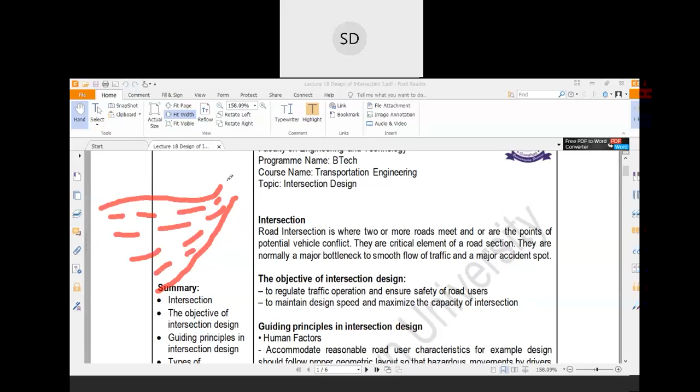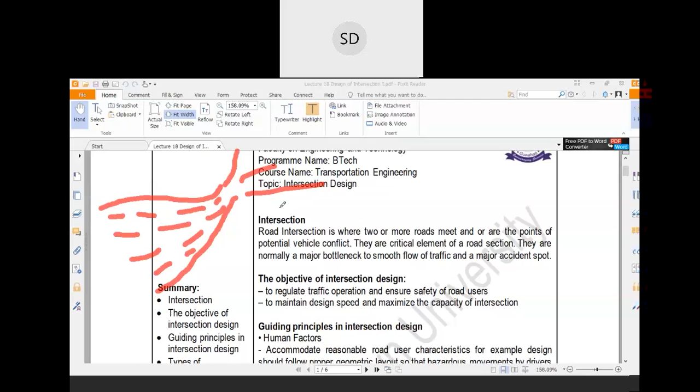And whenever they leave the intersection, again their path would be like that. So this is basically a bottleneck position, and as there are different roads merging with one another, there are vehicles from different directions, and for these reasons there are chances of accidents at intersections.

Now, the objective of intersection design is to regulate traffic operation and ensure safety of road users, and to maintain design speed and maximize the capacity of the intersection. So that is basically the objective of intersection design.

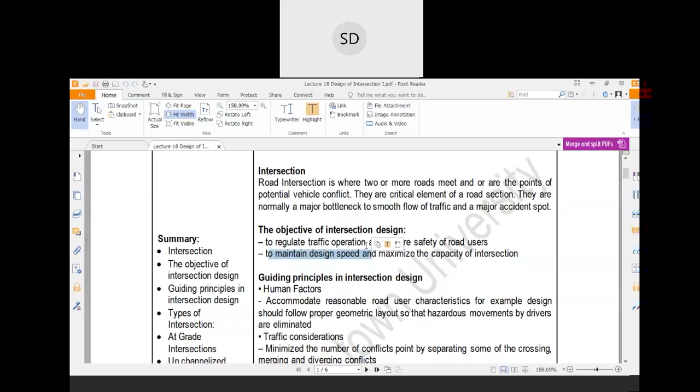So whenever you are designing an intersection, you have to keep in mind the amount of traffic coming from different roads which will be meeting with one another. Based on the traffic conditions or the number of vehicles merging at a particular intersection, you need to design that intersection based on that data.

Now, what are the guiding principles? There are different guiding principles which affect intersection design. The first one is human factors - there are different factors which affect human characteristics whenever they are driving in congested situations. This should accommodate reasonable road users' characteristics.

For example, the design should follow proper geometric layout so that hazardous movements by drivers are eliminated. In intersection design, you have to provide adequate sight distance, and if possible, provide more distance or more visibility to the intersection, so that all types of hazardous conditions can be avoided.

Then there are traffic considerations, which minimize the number of conflict points by separating some of the crossing, merging and diverging conflicts. What are these crossing, diverging and merging conflicts? We will discuss this later on in this class.

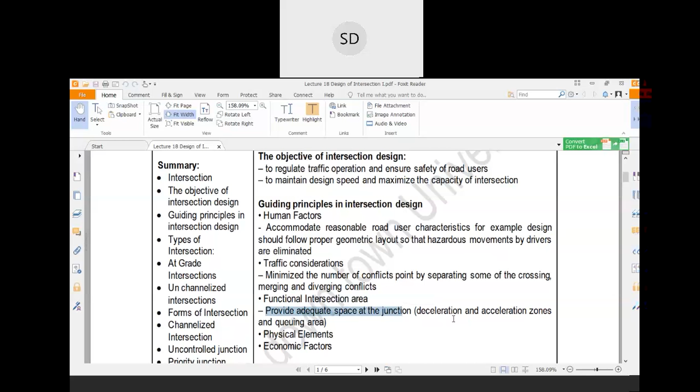Then there's the functional intersection area, which provides adequate space at the junction. Functional area means the portions where traffic changes its route - that is the main portion of the intersection.

And there are different physical elements like traffic islands. As we discussed in the previous class, there are different merging and diverging islands, and there are different elements which can be called physical elements.

Then economic factors are also associated with it. For a plain intersection there is not so much cost associated, but if you want to design an overpass or underpass, the cost required would be higher. Similarly, if you go for a signaling system, the cost may also be higher. So you have to think about different scenarios and justify the cost on which you will design the intersection based on the traffic scenarios persisting there.

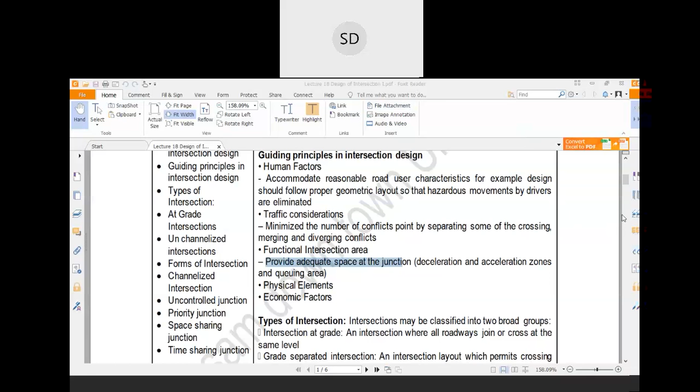Now there are different types of intersections. Primarily there are two types: intersections at grade and grade separated intersections. At an intersection where all roadways join or cross at the same level, they are called intersections at grade. Suppose we are considering a simple intersection like that - two roads meet with each other at the same level. So these types of intersections are at-grade intersections.

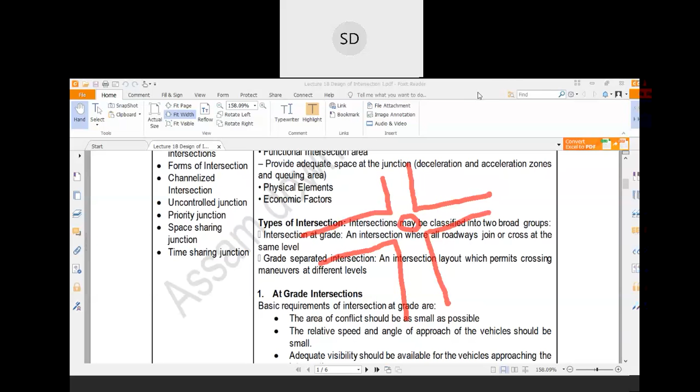This is a simple intersection. Now suppose there is a rotary intersection. In that case also this is an at-grade intersection where two or more roads meet at the same level. Now there is another type of intersection called grade separated intersection, where two or more roads meet at different elevations or different levels. For example, there are underpasses or overpasses or overbridges, whatever you may call them.

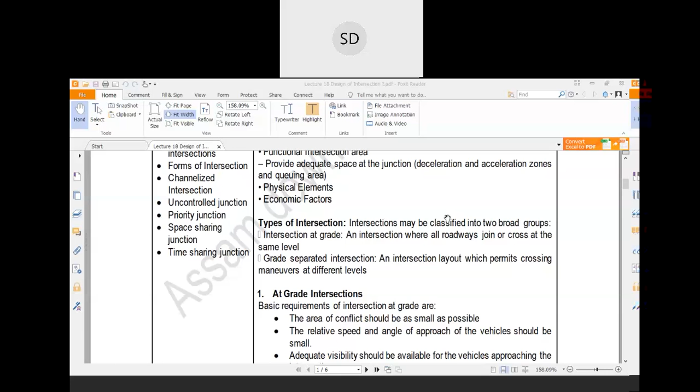Now if we discuss the at-grade intersections, there are different basic requirements when we go for at-grade intersections. The first point is the area of conflict should be as small as possible. Area of conflict means the area where different vehicles meet or there are different possibilities of conflict of vehicles. So that area should be minimum.

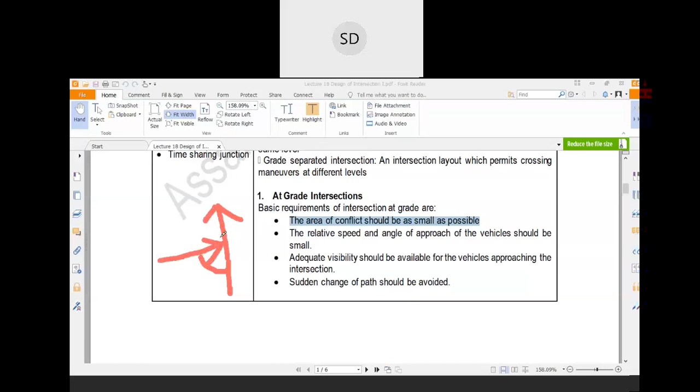Now if the angle of approach is more, there would be chances of severe conflict. Suppose this is a vehicle and this is another vehicle - if the angle of approach is more, in that case the severity of the accident would be higher. As the angle of approach becomes higher, at some point there would be chances of head-on collision. Therefore it is always advisable that the angle of approach be minimum. If the angle of approach is minimum, then if there is some conflict or accident, the severity of the accident would be minimized. That is angle of approach.

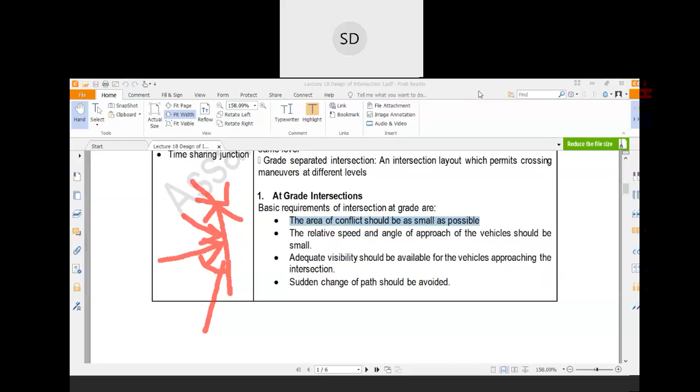Then adequate visibility should be available for vehicles approaching the intersection. If adequate visibility is not provided, the driver in a particular lane could not see other vehicles which are approaching from another route.

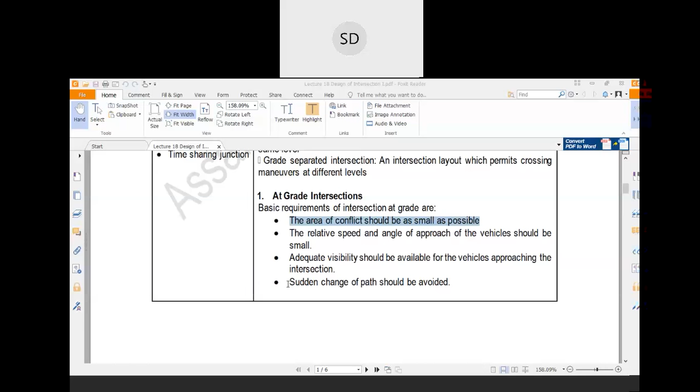Then sudden changes of path should be avoided. The intersection area is a very hazardous area, so in such an area, if any vehicle suddenly wants to change its direction or suddenly change its lane, it would become more hazardous. For this reason, it is always advisable that vehicles cannot change their path suddenly.

Then geometric features like turning radius and width of pavement should be adequately provided. You know that at the intersection there are chances of traffic congestion, so it would always be better that the intersection area has a higher width than the normal road section. In this way it can accommodate more vehicles.

Then proper signs should be provided wherever needed. Suppose some vehicles need to stop, in that case you need to mark it over there. In some cases you may observe that intersections are traffic police operated, and vehicles in a particular approach need to stop to make way for vehicles coming from another direction. In such cases, if vehicles need to stop at a particular position, you have to provide adequate road markings so that all vehicles can stop at that position, and no vehicle should cross that mark whenever a traffic police officer or signaling system signals to stop for that approach. Therefore the signs provided at the intersection should be very clear and understandable.

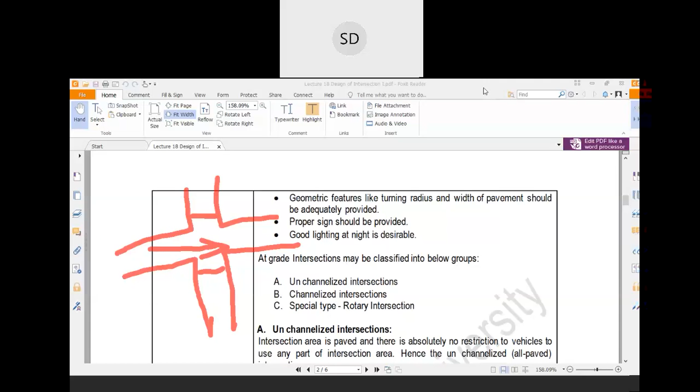Good lighting at night is also advisable and desirable for the swift operation of the intersection.

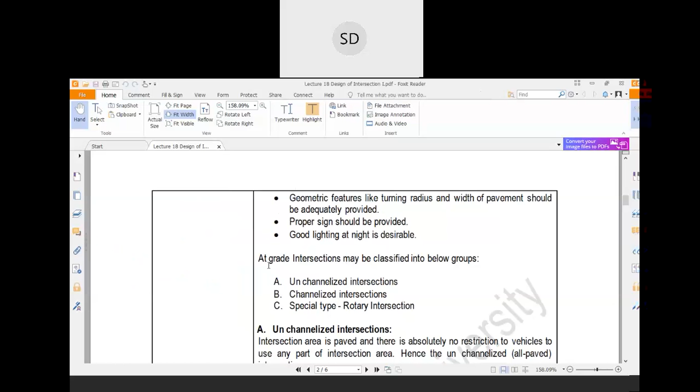Now, at-grade intersections may be classified into the below groups. There are different classifications for at-grade intersections. First is unchannelized intersection, then channelized intersection, and there is a special type called rotary intersection.

Unchannelized intersection is a very plain intersection where only two or more roads meet with each other, and where no channelizing island is provided. In our previous class we discussed the channelizing island. So in the unchannelized intersection there would be no channelizing island.

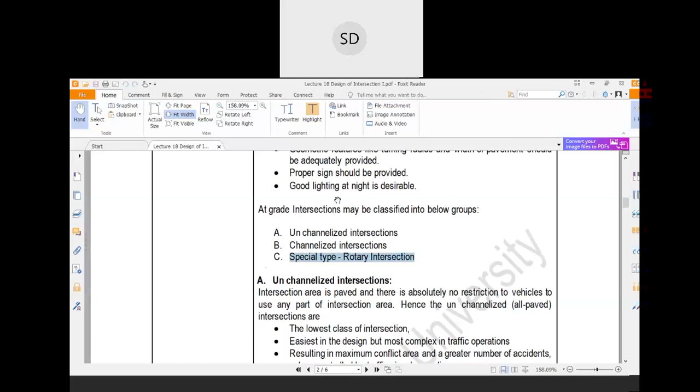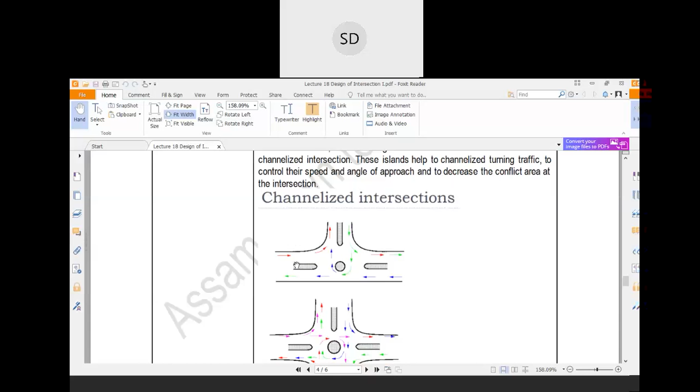What is this channelizing island? These are channelizing islands, which enable or force the traffic to move into different channels whenever they are trying to move into the intersection. In the unchannelized intersection this type of channelization would not be there, and it would be a plain, simple intersection like this one, with no channelization, only a simple plain intersection.

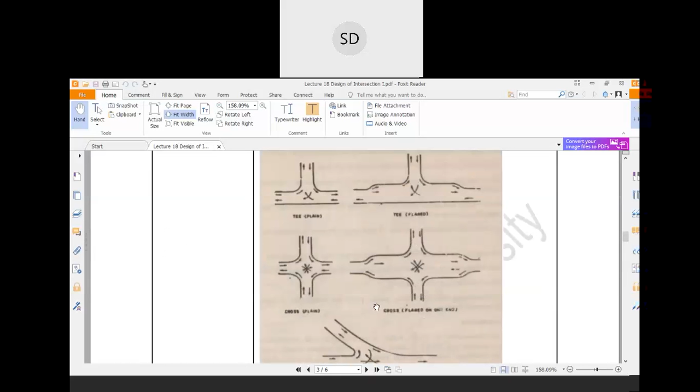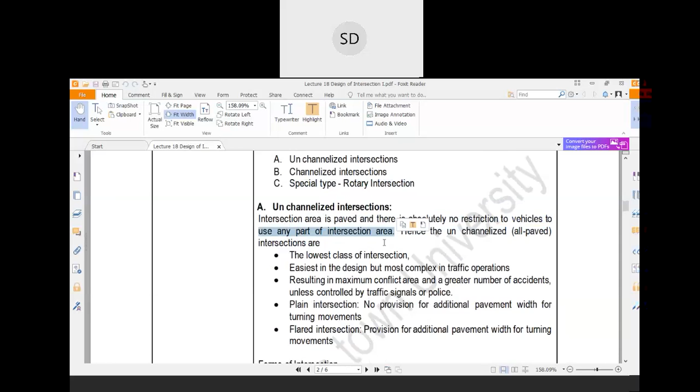In unchannelized intersections, the area is paved and there is absolutely no restriction on vehicles to use any part of the intersection area, as there are no channelizing islands; therefore they can use any part of the intersection area.

Therefore, unchannelized intersections are the lowest class of intersection, because they can manage traffic only to some extent, not to a great extent. Their management of traffic in the intersection is very low. They are simple, basic intersections, and they are easiest in design.

Why are they easiest? Because no extra element is provided in the unchannelized intersection. Therefore they are very easy to design, but the traffic operation in the unchannelized intersection is very complex, because it is very difficult to control all the vehicles whenever they try to move all together.

In some cases there may be chances of traffic accidents and huge traffic congestion if the number of vehicles increases tremendously for an unchannelized intersection. Therefore, unchannelized intersections are suitable at places where traffic volume is very minimal, since they result in maximum conflict area and greater number of accidents unless controlled by traffic signals or police.

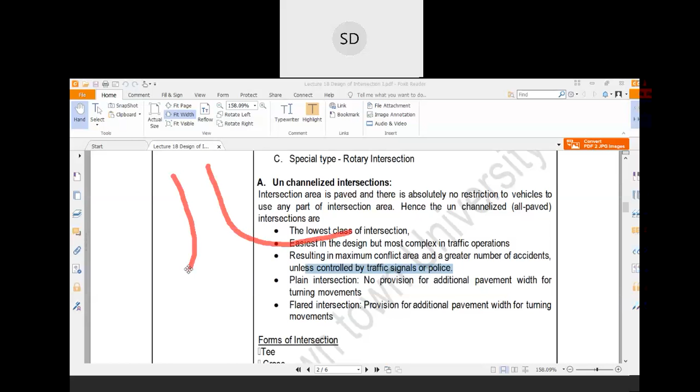Now how would a flared intersection be? A flared intersection would be like that. Suppose this is the intersection area. The intersection area would be wider than the normal road width, so that a vehicle can easily move from one route to another route swiftly.

So there are two types in the unchannelized intersection: plain intersection and flared intersection.

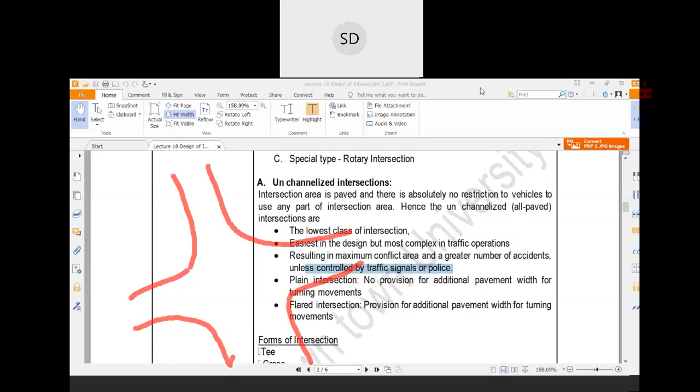Now, based on their forms, there are different types of unchannelized intersection. See the pictures; I think these pictures are visible to you.

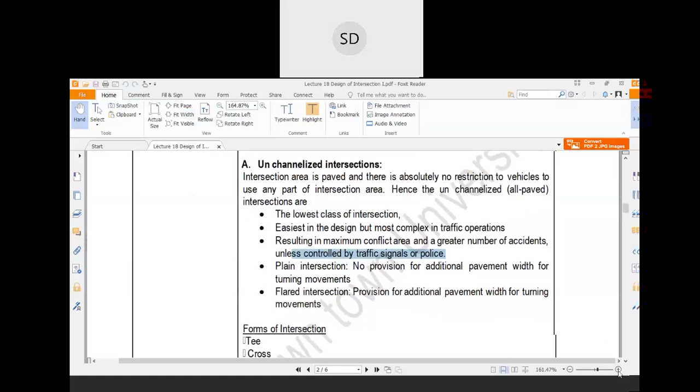First is T intersection. This is a straight road, and it meets another road at a 90-degree angle. This is called a T intersection.

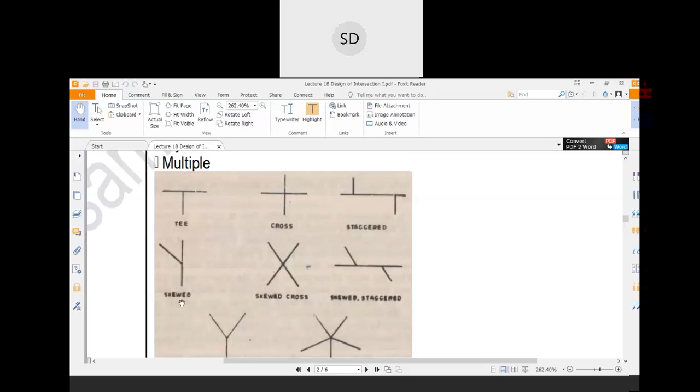Then skewed intersection - this meets the main road at some angle. This is skewed intersection, this is skewed cross, and this is skewed staggered intersection. This is Y intersection, and this is multiple intersection.

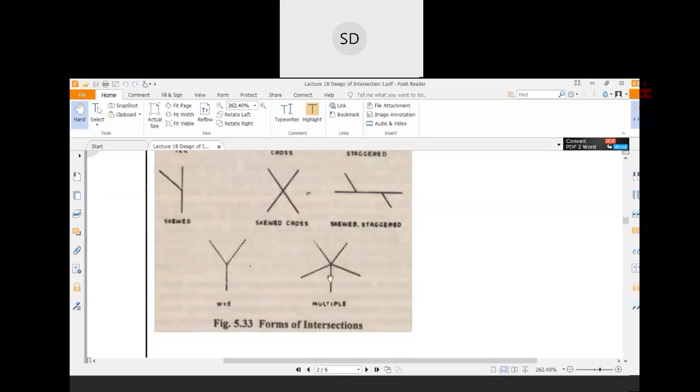Basically, this multiple type of intersection is not suitable for an unchannelized intersection.

See, these are the flared intersections and these are the plain intersections. This is plain, okay, these are flared.

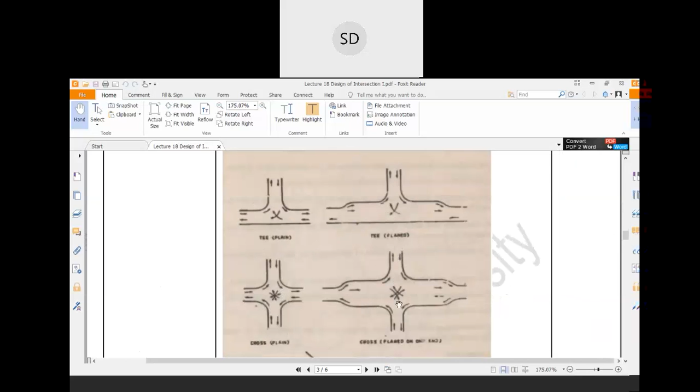Now, next point, traffic conflict. So the first one is merging conflict. Merging conflict occurs when vehicles enter a traffic stream at some angle.

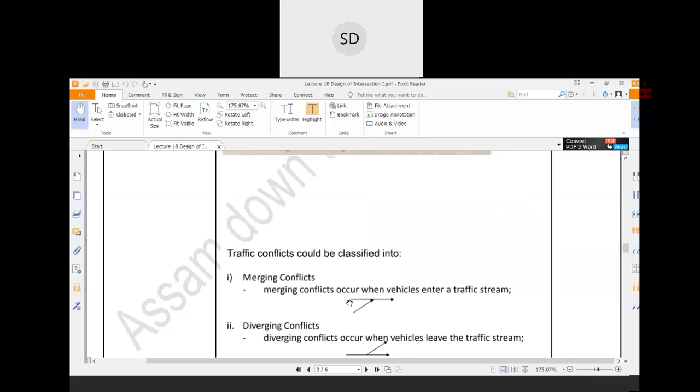Suppose this is your main traffic lane. In the merging conflict, some vehicle will try to enter the traffic stream at an angle. Basically this vehicle is trying to merge with that stream. Therefore this is called merging conflict.

Now another type is diverging conflict. Suppose this is the existing traffic stream, with different vehicles moving in this way, and sometimes some vehicles try to leave that traffic stream. This is called a diverging conflict, since they try to diverge from the existing traffic stream.

Then coming to the next, crossing conflict. Whenever two vehicles or two streams try to cross each other - suppose this is the existing stream, and another vehicle or stream tries to cross the path of the existing stream - this is called crossing conflict.

And the last one is weaving conflict. Basically here two streams are changing lanes and make crossing conflicts over there. So this is weaving conflict.

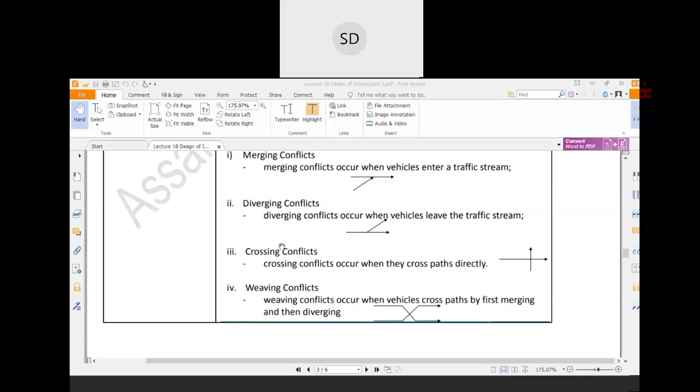Among these, weaving conflict is very rare. Among merging, diverging, and crossing conflict, the most dangerous one is crossing conflict. So as an engineer, your first task is to reduce the crossing conflict at a particular intersection.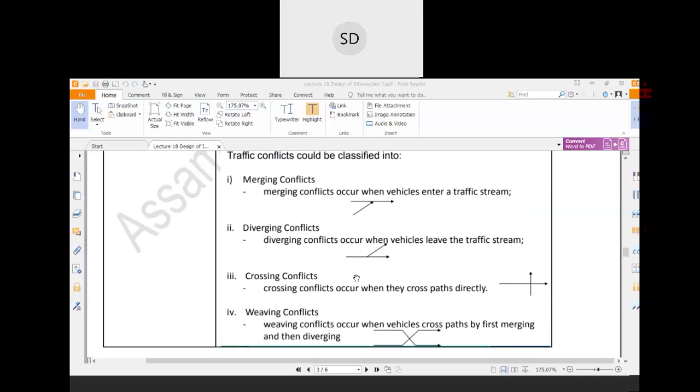Now, if we calculate the crossing conflict, merging conflict, or diverging conflict over a particular intersection, we can find these values. You can also draw this in your handbook if you wish to.

Suppose this is the road, and this is the path of the vehicle in this direction. Suppose this is a T intersection.

In that road, some vehicles will be merging or diverging from this existing lane and will go in this direction. So here one conflict position will generate - this is the conflict position. This is called diverging conflict because some vehicles from this existing lane are changing their route and going in that direction.

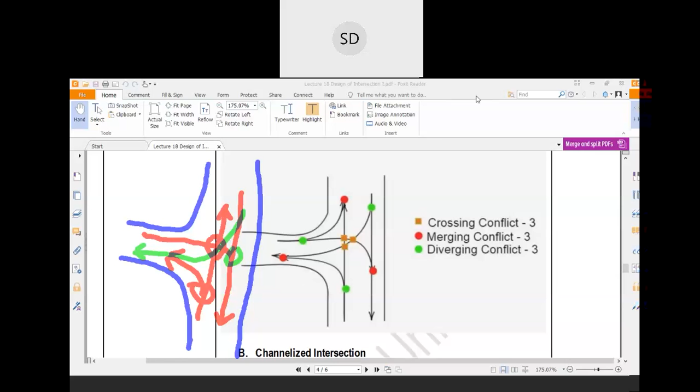Crossing intersection means like that - suppose this is an intersection. You can find out the total number of crossing conflict, merging conflict, and diverging conflict in this portion. So you can draw this.

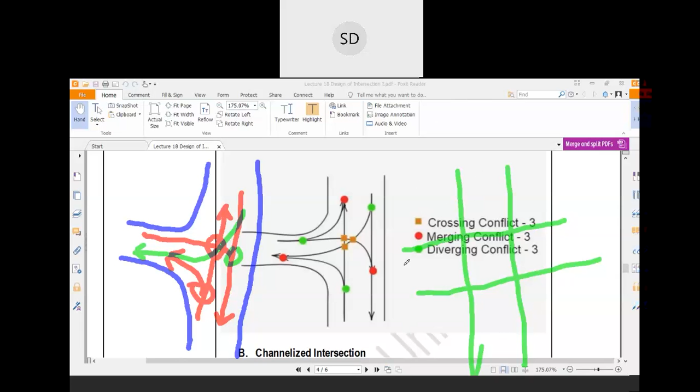So you can try to find out what are the different types of conflicts existing over there.

So next portion is channelized intersection. In the channelized intersection, there will be a channelizing island which will channelize the entire traffic stream. Separation of the conflicting movements at an intersection into definite paths of traffic flow by means of lane marking, island, road curbs, or other means is called channelization.

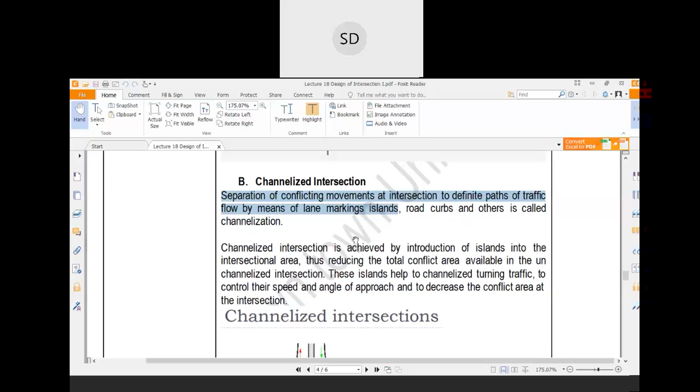So basically you are channelizing different conflicting traffic through different channelizing means, like channelizing islands, pavement markings, or road curbs, etc. Now, channelized intersection is achieved by introduction of islands into the intersectional area, thus reducing the total conflict area available in the unchannelized intersection. These islands help to channelize turning traffic, to control their speed and angle of approach, and to decrease the conflict area at the intersection.

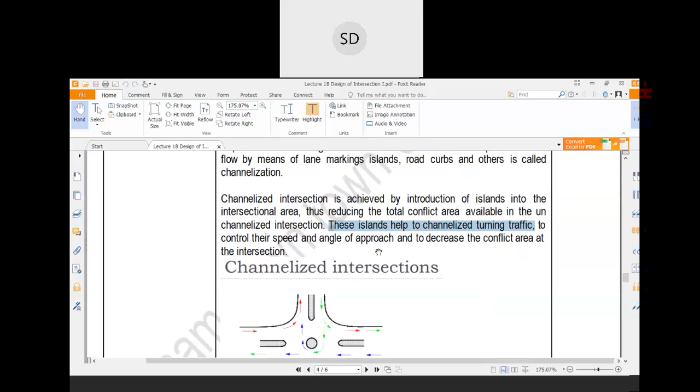Now previously, this was a T intersection. For the T intersection, you have found out the total number of crossing conflict, the total number of merging conflict, and the total number of diverging conflict in this plain T intersection.

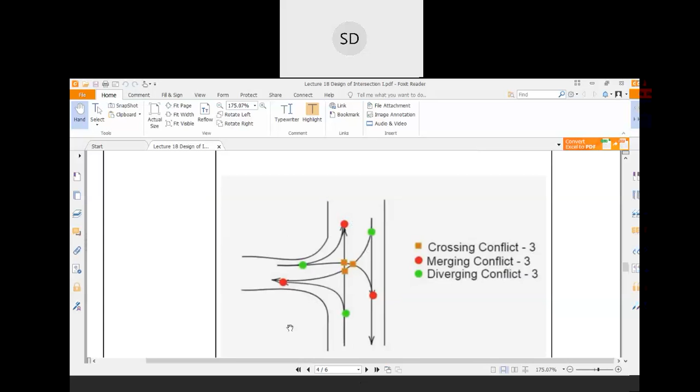Now, similarly, you can find out what is the total number of conflicts in this channelized T intersection, and you will find out that the number of crossing conflicts in the channelized T intersection will be significantly reduced. See, in the channelizing island, a central small rotary section is provided.

These vehicles will be going in this direction, and previously they would simply make some crossing conflict, but here they merge with the existing traffic. Suppose this is the traffic stream, they will merge over there, and at another point they will diverge from here, and again merge in this portion. So using this channelizing portion, you have reduced the number of crossing conflicts over that particular area.

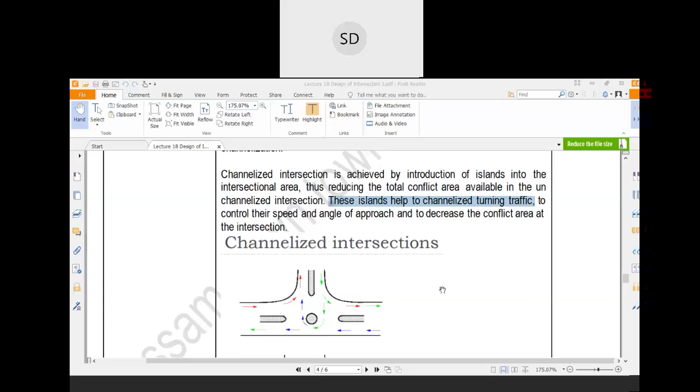So this is the benefit of channelizing the intersection, and this is the usefulness of a channelized intersection. Whenever your traffic is more, in that case you can provide the channelizing island to control the traffic.

Now, advantages, as we discussed. Vehicles can be confined to definite paths. The channelizing island provides a proper place for installation of signs and other traffic control devices. So if you want to put some traffic signs and other devices, you can place them over that island.

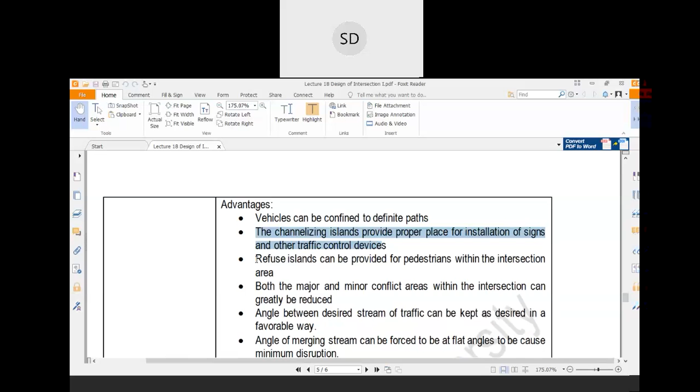Refuge islands can be provided for pedestrians within the intersection area. Suppose some pedestrians try to cross that path, in that case they can rest over that intersection area, and whenever there is no vehicle they can cross that particular area. So this portion can act as a refuge for the pedestrian.

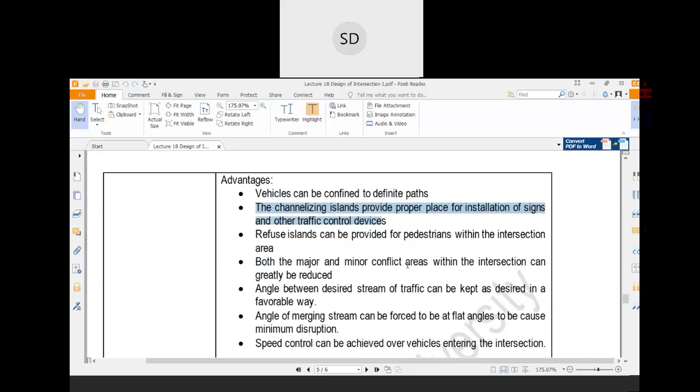Both the major and minor conflict areas within the intersection can greatly be reduced, as we discussed. The angle between the desired streams of traffic can be kept favorable, that is your angle of approach.

Angle of approach can be minimized with the help of a channelizing island. Then the angle of merging streams can be forced to as flat an angle as possible to cause minimum disruption. So merging angles or diverging angles can be kept as minimum as possible.

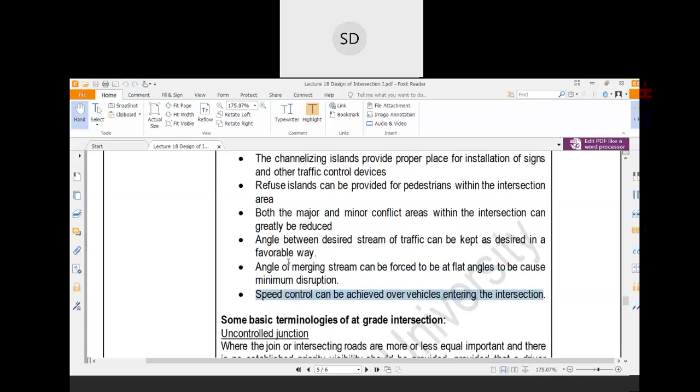And speed control can be achieved over vehicles entering the intersection, as they are forced to follow a particular path, therefore their speed would be automatically reduced.

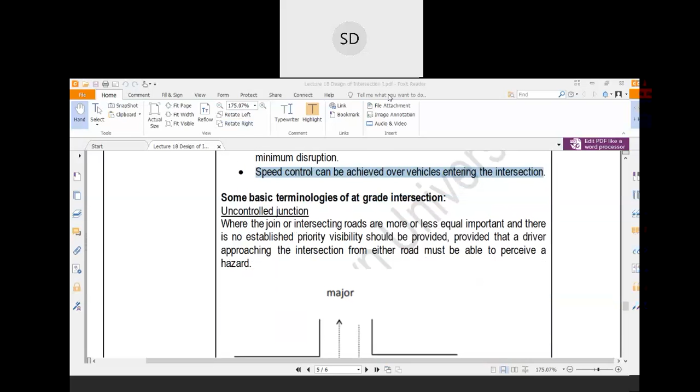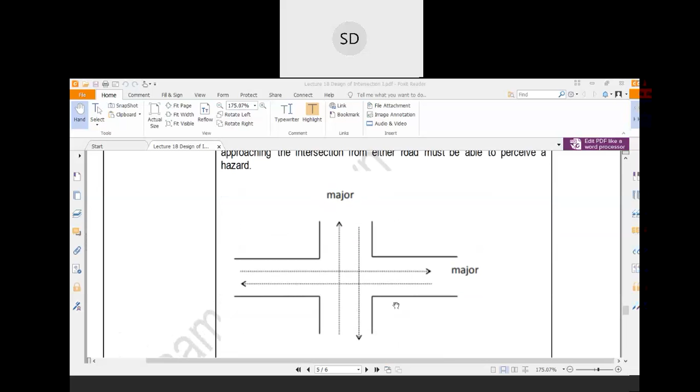Now there are some basic terminologies used in at-grade intersections. The first one is uncontrolled junction. This is an uncontrolled junction where two major roads meet with each other, and there is no imposition, no traffic signals, no traffic signs, etc. This is an uncontrolled junction, there is no control.

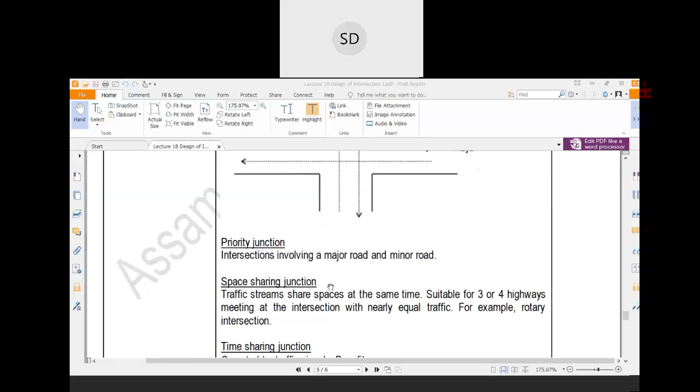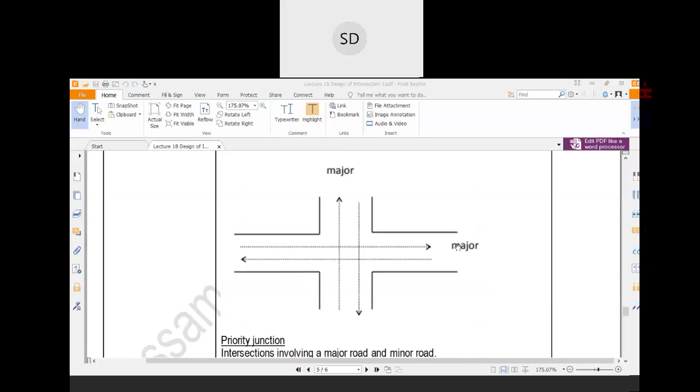Then priority junction. In uncontrolled junctions, here two major roads meet with each other. Now suppose another road is there, that is a major road, and it meets with a minor road. This type of junction is called a priority junction. Suppose on your college road, there is a main road which goes towards Panikhaiti, and there is another road which comes to your college, and that road diverges from the main road and connects to your college. So that type of intersection is a priority junction.

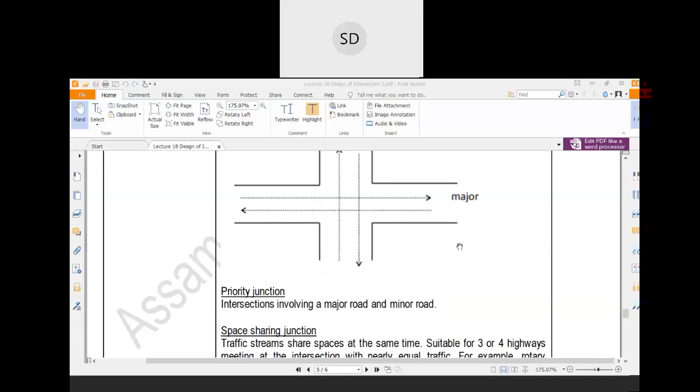Then space sharing junction. In the space sharing junction, traffic streams share space at the same time. It is suitable for 3 or 4 highways meeting at the intersection with nearly equal traffic. For example, rotary intersection.

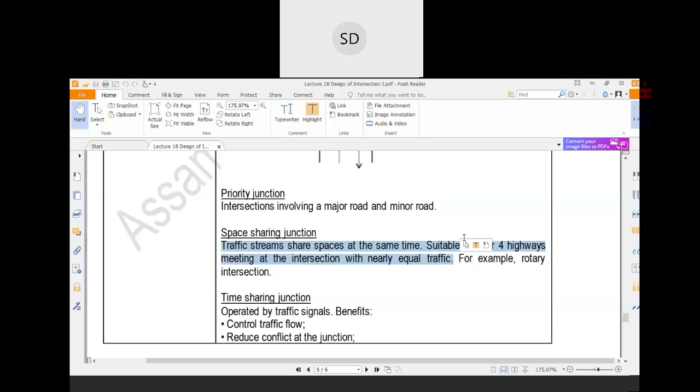In the rotary intersection, what happens? All the vehicles from the different streams are forced to move encircling a central island. So at the same time they are sharing a particular space. This is called a space sharing junction.

Then time sharing junction. Time sharing junction means these are operated by traffic signals.

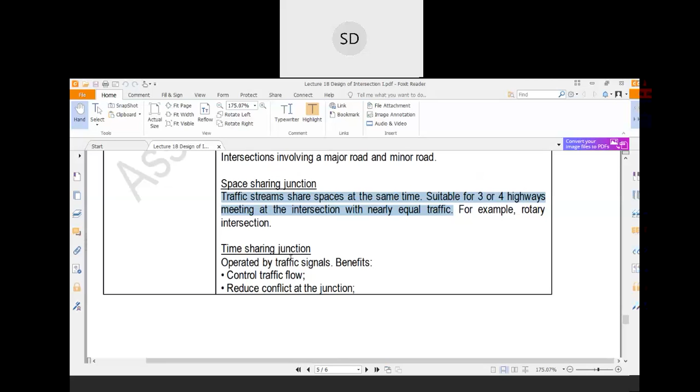So the benefits of the time sharing junction, or signaling system, are: it controls traffic flow, it reduces conflict at the junction, and it is also safer for pedestrians, because with a traffic signal you stop the movement of traffic in a particular stream and allow movement of vehicles in another stream. So the pedestrian can easily cross the road whenever there is a stop of vehicles in a particular stream. And it uses less area compared to the rotary intersection, because in rotary intersections or roundabouts a huge space is required for the central island, but in signalization, you just need some small place at the roadside to install the signal, that's it, and it will require very minimum space.

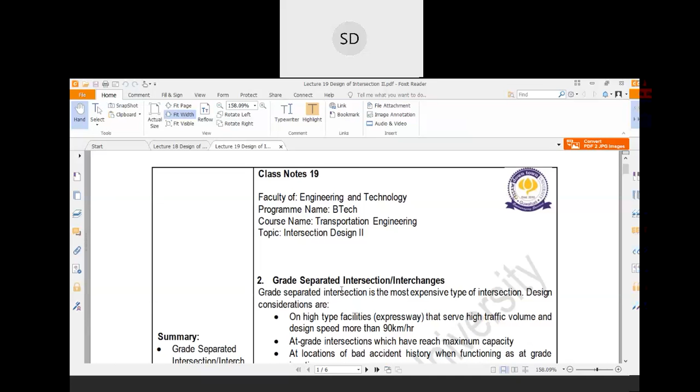Now coming to the next portion, grade separated intersections, also called interchanges. This is the most expensive type of intersection because you need to design it at different elevations by means of underpasses or overbridges. You know the cost associated with overbridges.

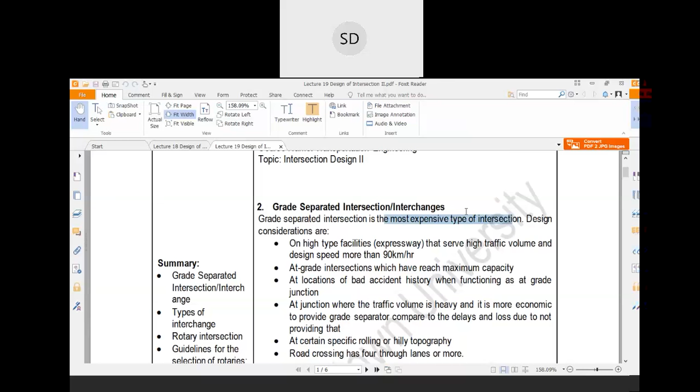So in such cases, grade separation is very much needed. At grade intersections which have reached maximum capacity - suppose the maximum limit of the at grade intersection is the rotary intersection, and this rotary intersection cannot manage the traffic existing there - in that case you have to design a grade separated intersection.

At locations of bad accident history when functioning as an at-grade junction - suppose a particular at-grade junction has a very much higher number of accidents - in such cases you can design a grade separated junction, where the traffic volume is heavy and it is more economic to provide grade separation compared to the delays and losses due to not providing it.

Suppose the number of vehicles in a particular junction is very much higher. In that case there would be traffic congestion for a longer period of time, and the delay caused to vehicles would be much higher. In such cases you can always provide the grade separated intersection.

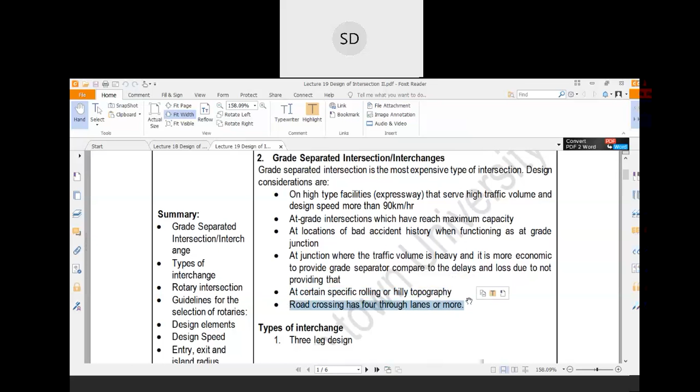Then, when a road crossing has 4 through lanes or more - suppose a road crossing has 4 lanes and a much higher number of traffic - in such cases you can provide the grade separated intersection.

Now there are different types of grade separated intersections. The first one is the 3-leg design. Here is a primary road section and another road section. Now see this portion here.

See this portion - the road sections meet at a different level. They are not meeting at a particular or same level, but at different levels. This type of design is a grade separated intersection, and this design is the three leg junction.

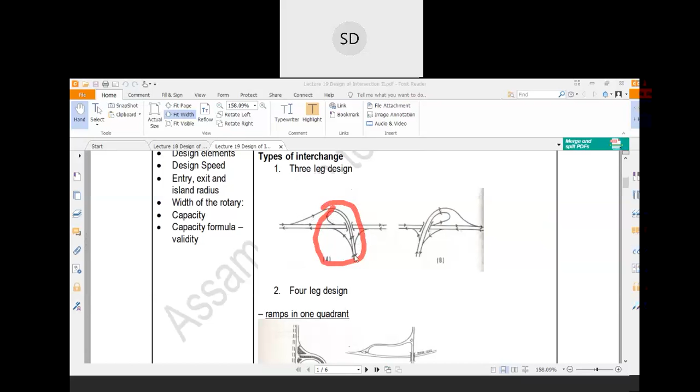Now another type is the four leg design. See, there are four legs - 1, 2, 3, 4. This is called the four leg design.

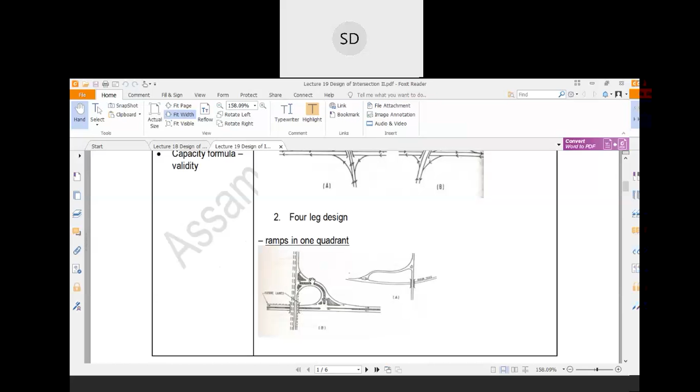So the vehicles which want to go in this direction just go in the underway and around this portion, and will meet with the traffic over that area. So there will be grade separation at this point, but at grade over this point. This is the four leg design.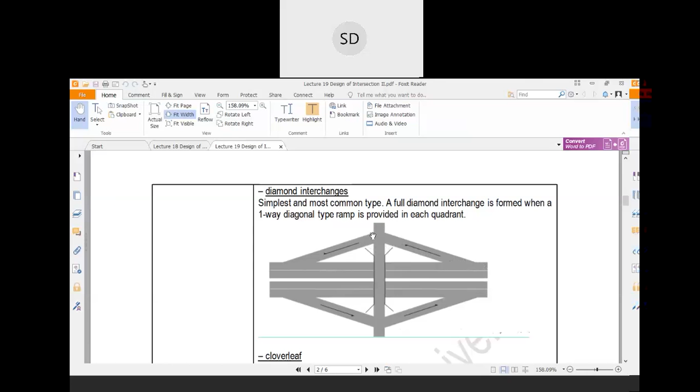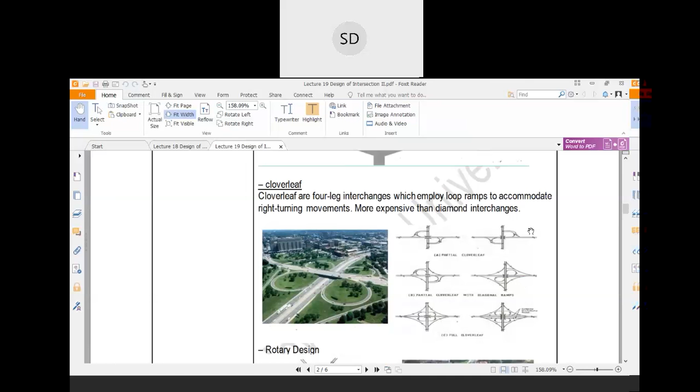This is called the diamond interchange, and this type of interchange is called clover leaf. This type of interchange is more expensive than the diamond interchange.

Then there may be a rotary design. This type of design is called the rotary design, because there is a central island like a rotary intersection, but that would be an at grade intersection.

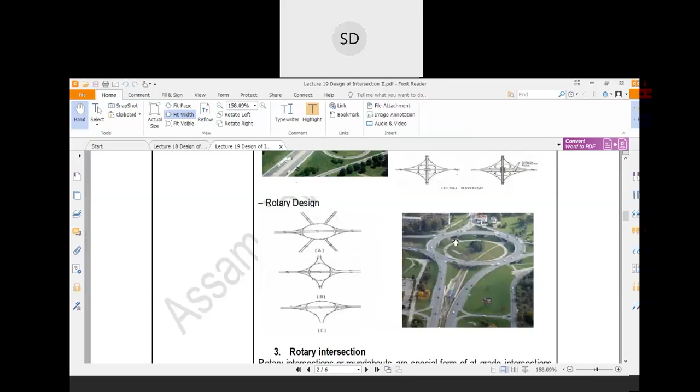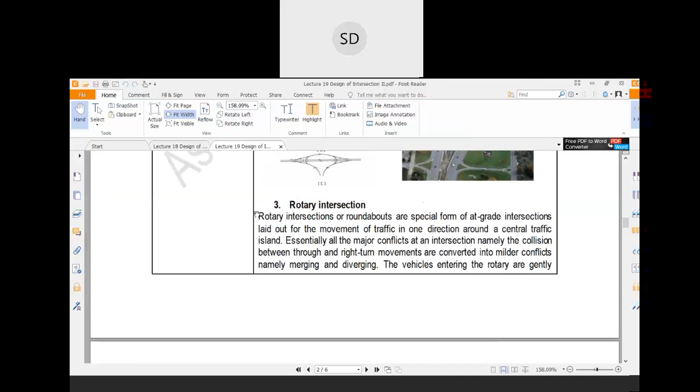And there is another special type of intersection which is called the rotary intersection. We will discuss this portion in our next class. So in our next class we will discuss the rotary intersection. We will meet at 1 p.m.